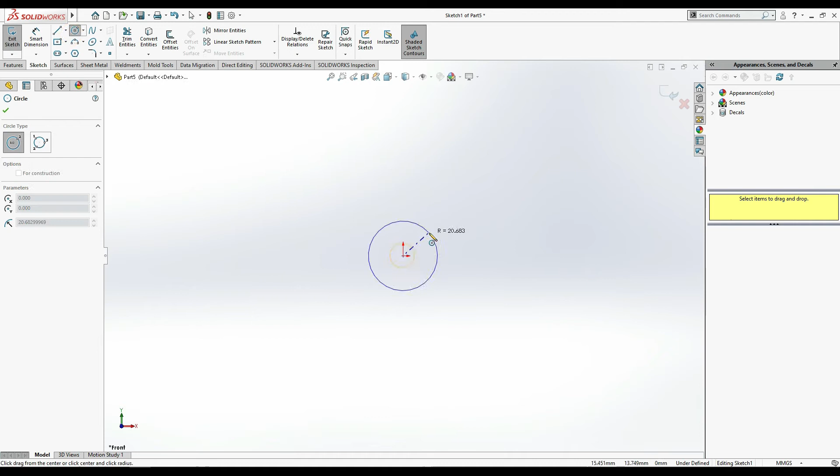So let's start to draw a bolt. First I'm going to make a shaft, 10 mm. Extrude it. Now I'm going to make the head, 5 mm.

Select this face, sketch. I'm moving a little bit faster, so smart dimension. This one I want to make 5 mm, or let's make it 6 mm.

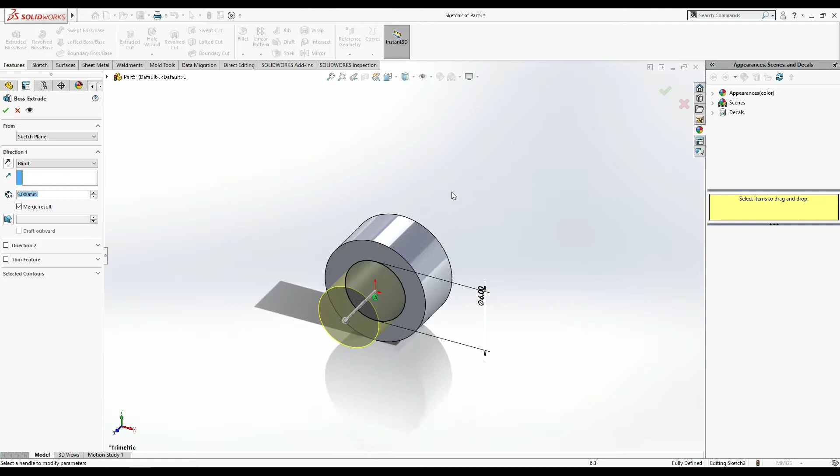That's the standard size of a bolt. So feature extrude, I'm going to make it 15 mm. Okay, or 20 mm. That's going to be a little long. Okay, this one is done.

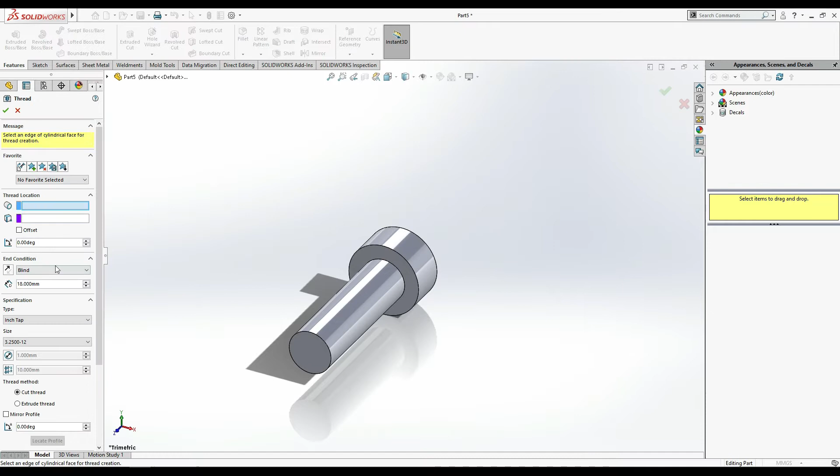Now next is to make the thread over this one. So for this, hole wizard and thread. I'm going to go with the standard one first, like this, and 18 mm. Okay, but I'm going to make it 16 mm.

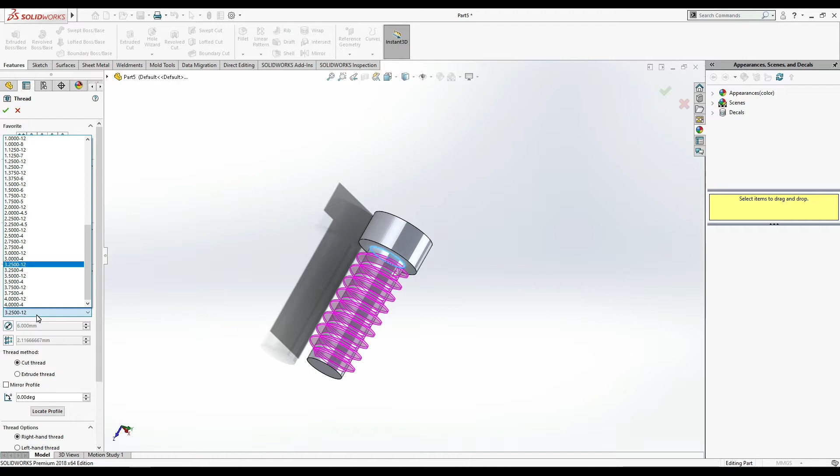Let's say it's going to be inside. Let me make it 18 to cross this one. It's going to be at the end of the bolt, so it's 3.25, or you can change this.

.75. Okay, no need to change this. 2.75, or let's say 2.5. Okay, 2.5 by 12. 2.75 by 12. Okay, it's done.

And if I am going to make an outer thread, then I have to extrude thread. This green color indicates that you are doing well, a right hand thread.

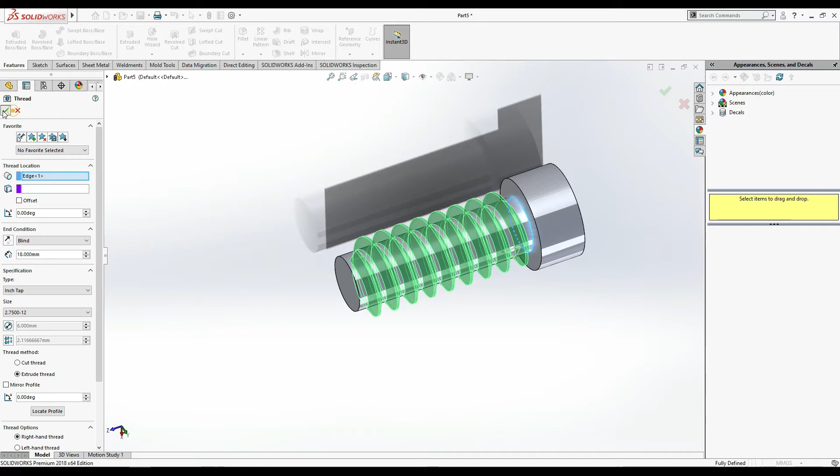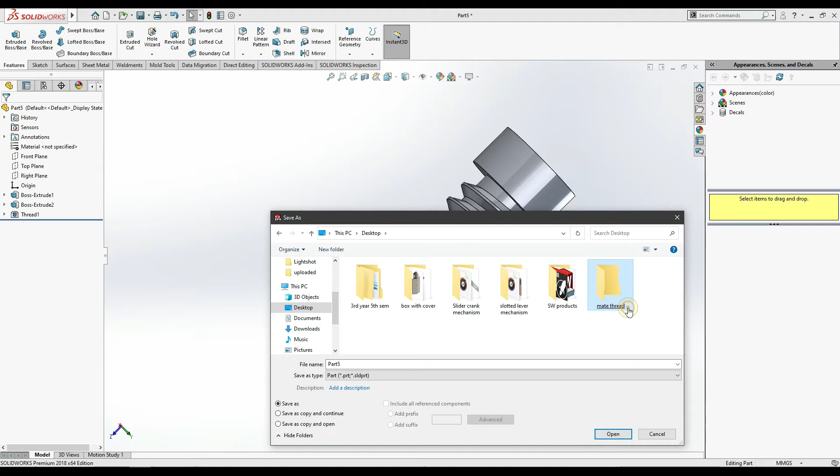Our thread is done. Now simply save it, Control S, and save it on documents, or let's save it on desktop, and save it as mate thread. Okay, save it here as bolt. Rebuild and save the document.

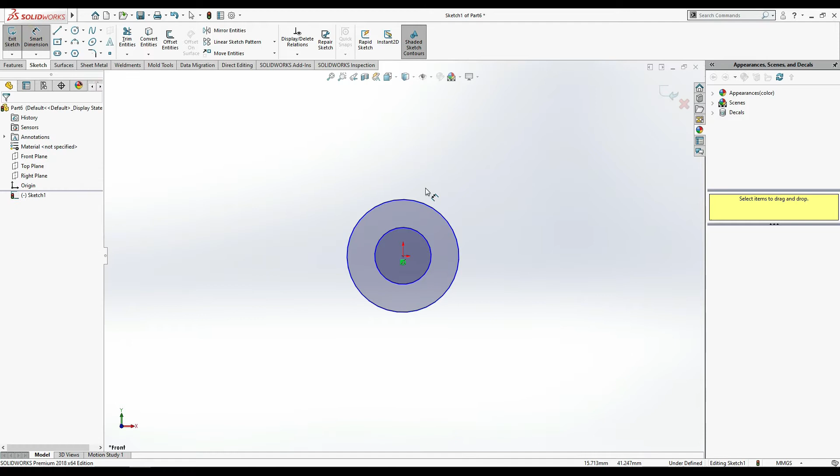Now close this, and we need to make a nut for this part. Front plane, sketch, and make 2 circles. How much do we have? 10, yes 10, and this one is 6 mm. Same as our bolt, features, extrude, and we are going to extrude it up to 5 mm.

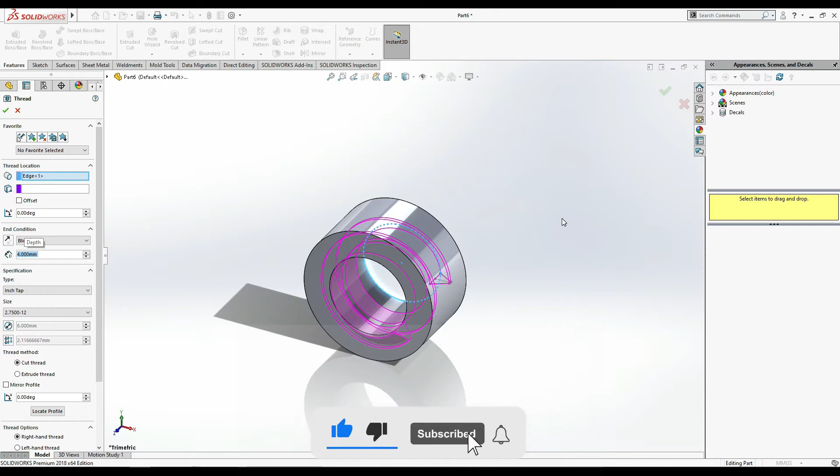Go to hole wizard, thread, select the outer... 18, no it's 4 mm, so it will be inside of 4 mm, or 3.8. It's not going to come, it's 3. Oh no, it should be 3.5.

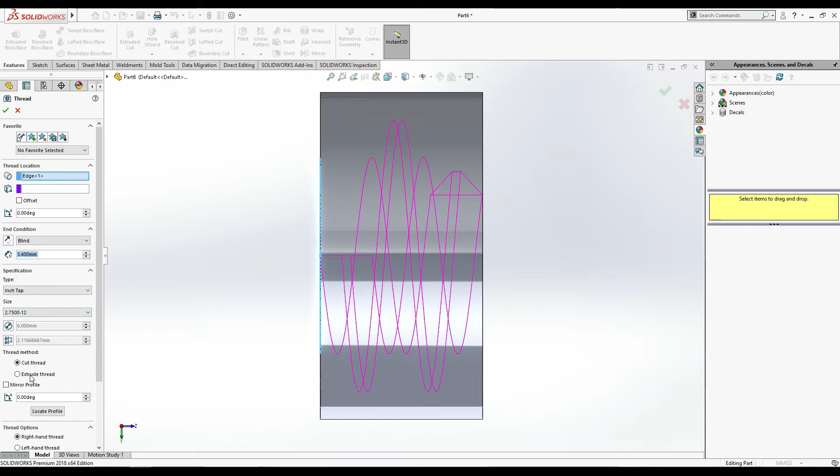Let's see, is it coming out? 3.45 and 3.4. Okay, cut thread, and okay, it's done. Control S.

Add nut, close it. And now we are going to do assembly.

In assembly, first of all go to this, close it. Okay it got stuck, come here, turn this on both, and now assembly and insert component. Okay, now here we have a bolt and nut.

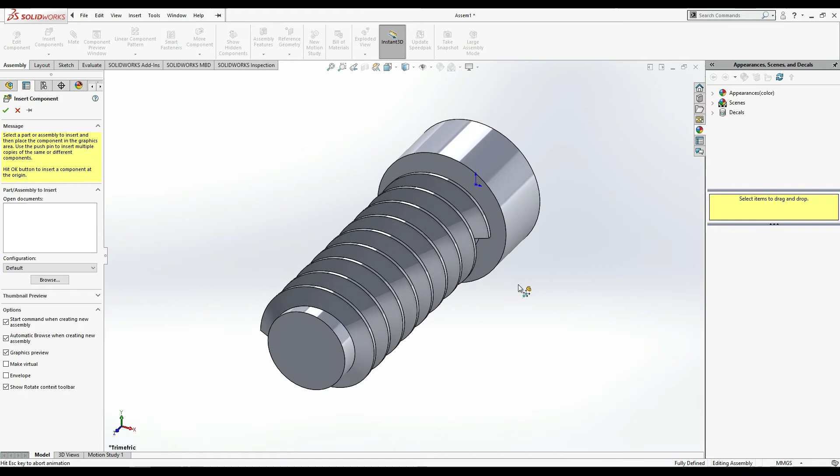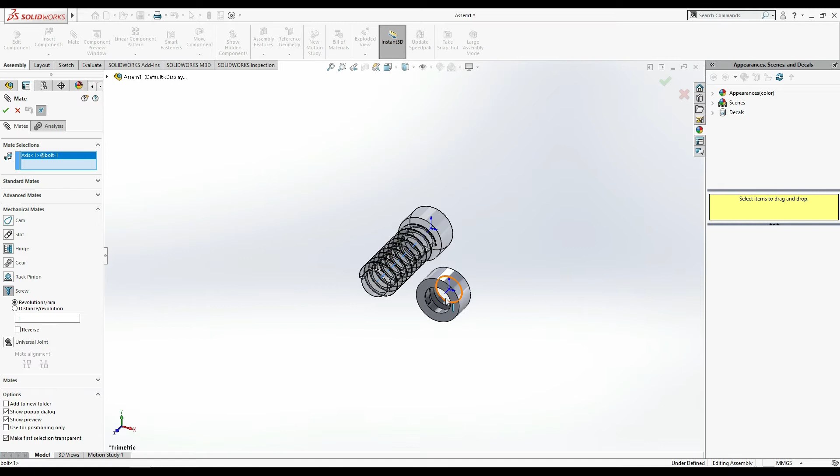Let's take this bolt and put it on the origin. Now we need a nut, take it and put it here. Now if I go to mate, I have the option mechanical mate, and here is the option screw. So you need to come here, turn this on, and select its axis and select its axis. It's going to mate.

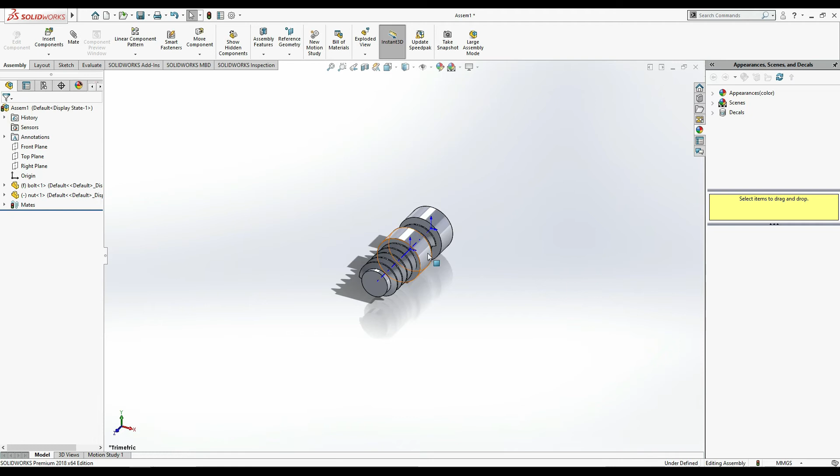Here is the option revolution per mm. It will cover a distance of 1 millimeter in 1 revolution. If you want to change it you have the option. I am going to put it as, okay let's see it. Okay it's done, now you can see if you rotate it.

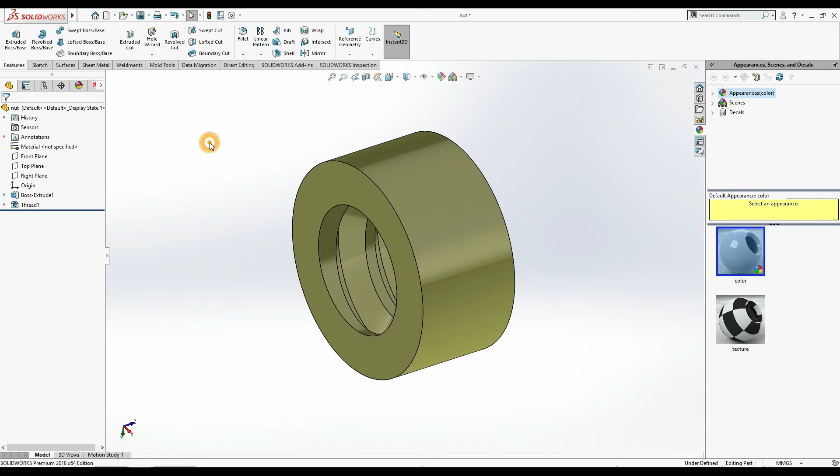Let me turn off this, this, this, and this. Let me change its color. Open part and change its color appearance, and I'm going to put this yellow color. Control 7 for isometric view and Control S.

Now close it and open this one and change its appearance to this black color. Control S and close it. Now you can observe its movement. I am rotating it here, and you can see it's covering the distance here.

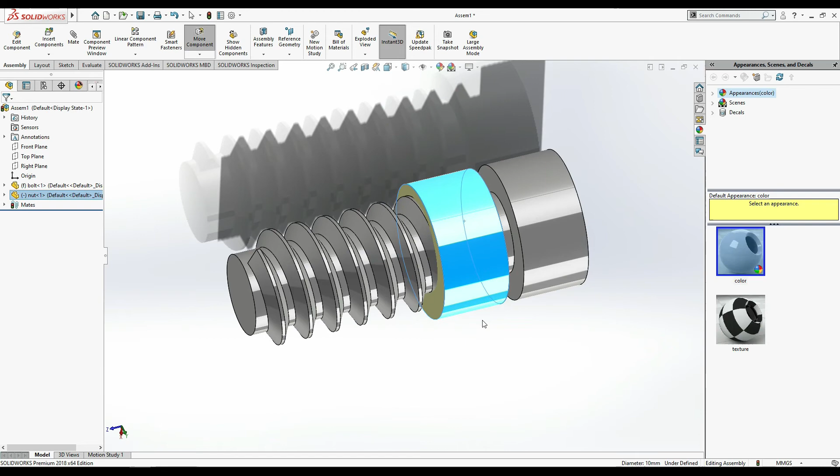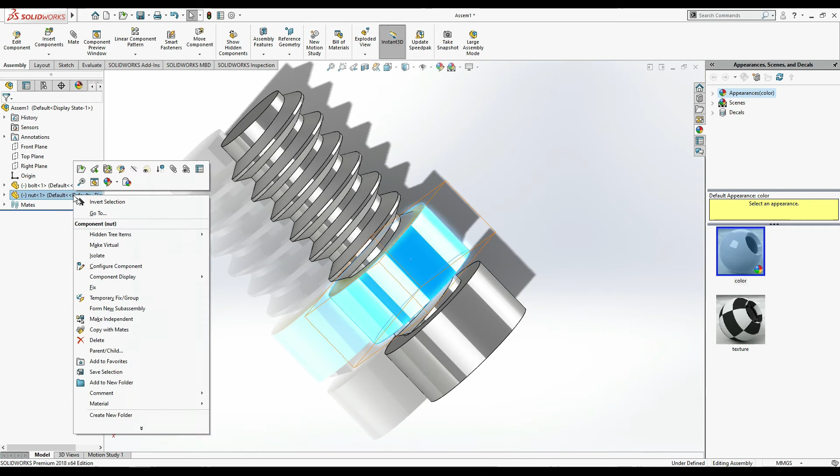Now Control 7 to take it to isometric view, or you can change its view using your mouse. Right click and make it float now, and now put it as fix and turn it. It's up to you, whether you want to make your nut or your bolt fixed, it's totally up to you.

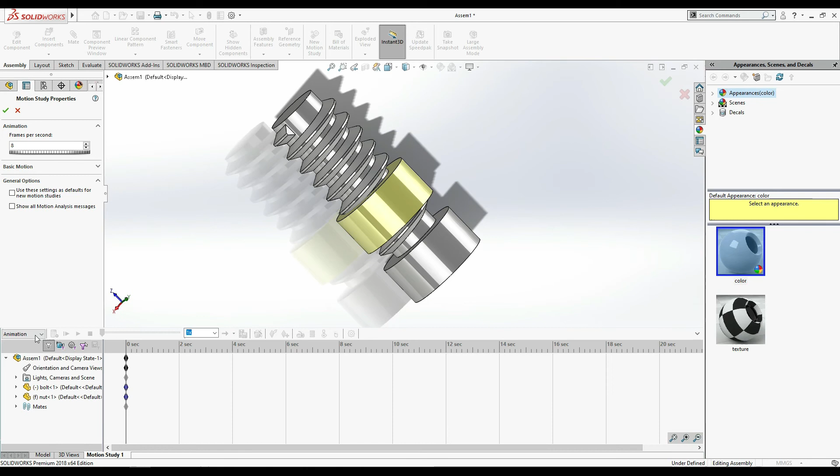You can also go to motion study, take it out, make it a motion study or basic motion, and put this motor on this. It's going to be counterclockwise, you can see.

Take it to the origin or starting point, and now here put 10 revolutions per minute, or no, 50 revolutions per minute, and now calculate it. You can see the nut is fixed and the bolt is coming out.

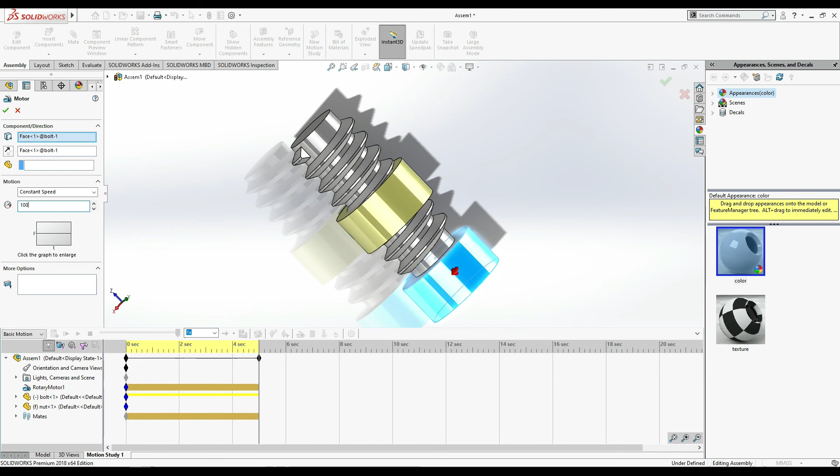Now you can right click here and edit features, take it to 100 rpm, and now again calculate it so you can see its motion.

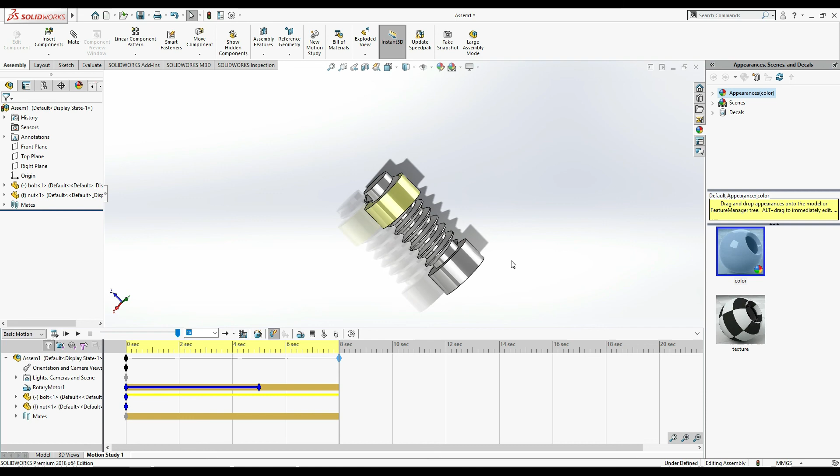Take it to here and again calculate, so it will be totally at this point. Control 7, hopefully you are... Control 7 to take it to normal, and you can see its motion at all positions.

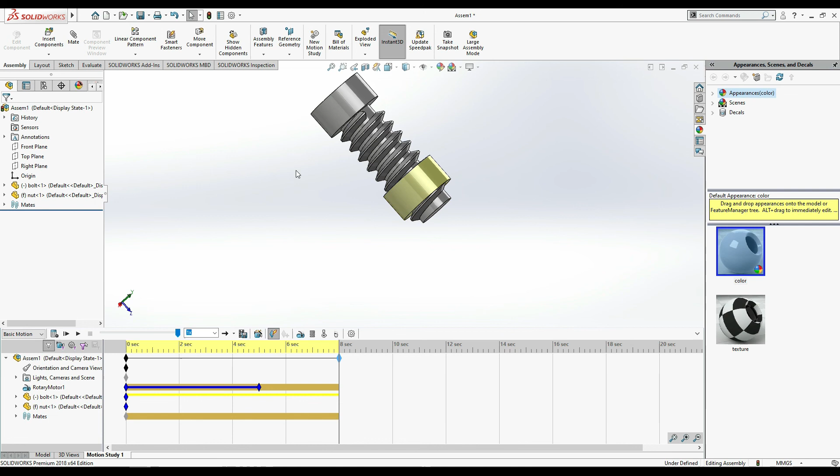Hopefully you understand how to make a nut and a bolt, and how to make an outer thread and an inner thread. So this tutorial is going to end here.